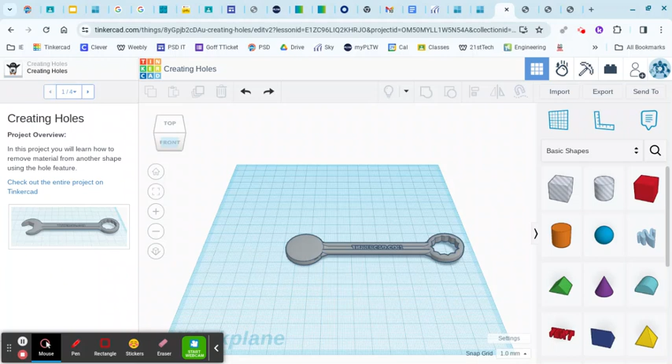Hi everybody. Today we are going to take a look at the creating holes tutorial, or as we call it, the wrench. In this project, you will learn how to remove material from another shape using the hole feature. Check out the entire project on Tinkercad.

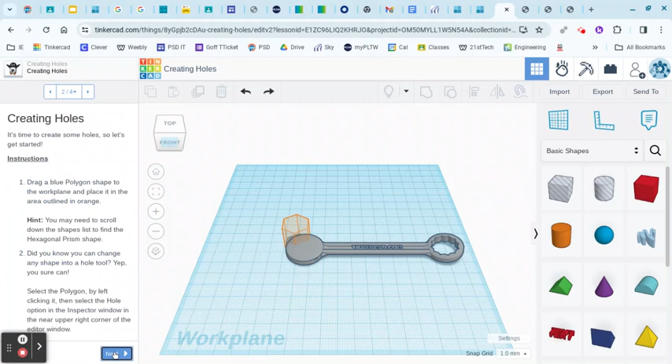So we're going to do this right here. We've got our wrench right there, they've made that for us. We are going to click next. I'm sorry, I moved this a little bit, so I'm going to fix that. Our wrench is right there in the middle, and you can see the hint is right here.

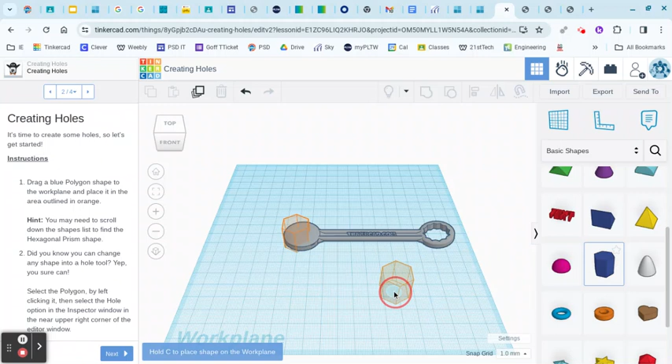They're waiting for the hexagon. It says drag a blue polygon shape to the work plane, which is right here. In the first lesson we learned about the cruise feature, and I'm going to drag this over and watch what happens. The cruise feature drops it automatically on top, and that's kind of a pain.

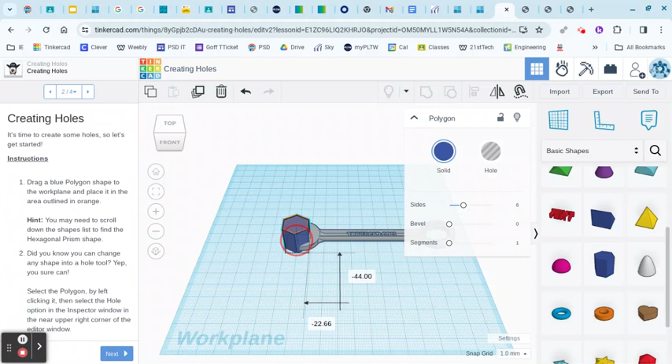So I'm going to delete that. I'm going to draw out another hexagon, but I'm just going to put it on the work plane. Once it's on the work plane, we can actually just drag it over here and it will go in the middle of the wrench. Because we're creating a hole, we want this shape to go through the wrench. So you can see right here, the hexagon is entered into part of the wrench.

So now it says, do you know that you can change any shape into a hole tool? Yep, you sure can. So select the polygon by left clicking on it right there. Oops, sorry, I got the wrench. I want the polygon. There we go.

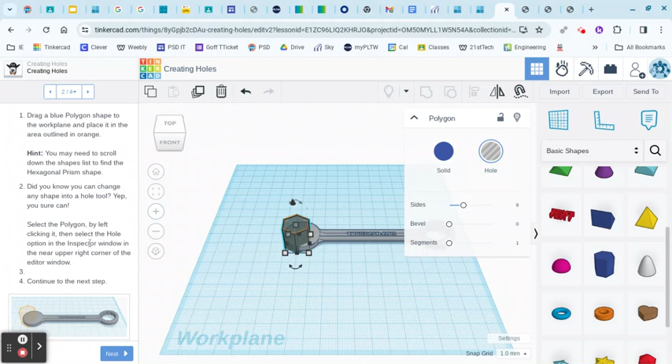Now we're going to come over here and change it from solid to hole. That creates the same shape in empty space. Remember, this stripe pattern means that our shape is actually empty space in that shape. I think most of you know what a wrench looks like - there's an empty space where you can fit it around the nut that you need to tighten or loosen.

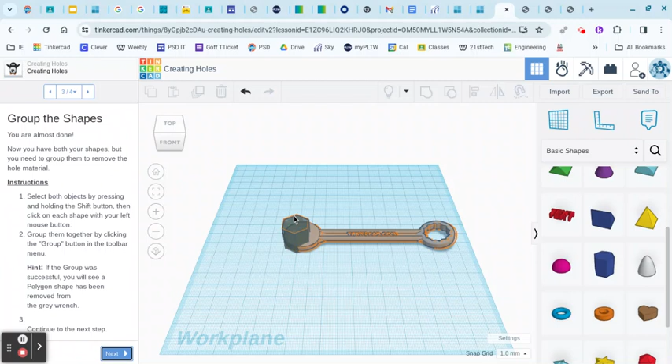So I'm going to hit the next button, and it's going to tell me to select both items. My hexagon is selected, and I'm going to hold down the shift key and click on the wrench. Oops, for some reason that disconnected. So I'm going to click on the hexagon again, and we're not clicking on that. Let's see, I'm going to click on there, then come click on the wrench.

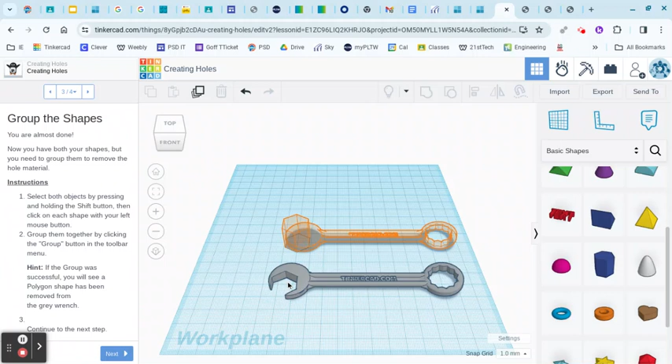Now it says I've got shapes too. I'm going to come up here and click on the group tool. It's going to take a second. Now I'm just going to click over here and drag my wrench down, and you can see I've created an opening in the wrench. Doesn't look 100% perfect, but for our purposes we have been successful because we've created the empty space we were trying to create.

I'm going to click next to go on to the next step just because I like to see the fireworks. You've been successful. So what you want to do is take a screenshot of this because you're going to turn this in as part of your portfolio at the end.

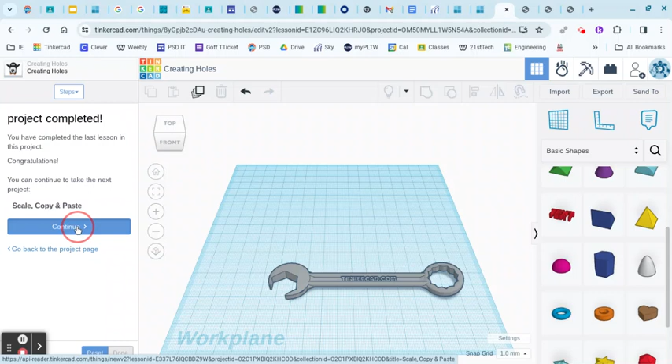Now I'm going to click done and it's going to ask if we want to continue. The second must-do that we have to do is scale, copy, and paste, which you can only find right here - you won't find it in the list of tutorials. So I'm going to click OK or continue, and we're going to go on to the next one, which is scale, copy, and paste. Go ahead and get that done. Take a screenshot of scale, copy, and paste when you get that done, and then you'll have what you need to be successful with your must-dos.